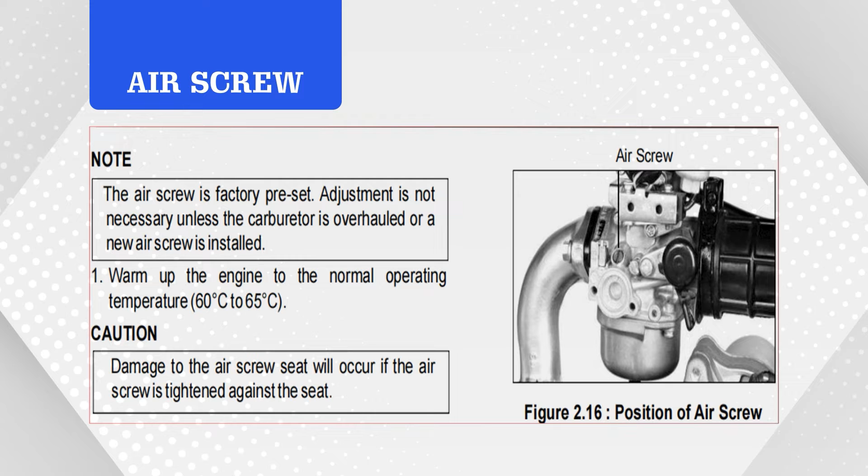For air screw tightening, first warm up the engine to the normal operating temperature, that is 60 to 65 degrees centigrade. Then set the air screw initial opening by turning the screw out 1 to 5/8 turns, and the idle speed should be kept at 1400 plus or minus 100 rpm.

Step 1: Stop the engine and connect a tachometer. Turn the air screw clockwise until it sits tightly, then turn it out to the specifications, as shown in figure 2.16.

Start the engine and adjust the idle speed with the throttle stop screw. Turn the air screw in or out slowly to obtain the highest engine speed. Readjust the idle speed to the specified value with the throttle stop screw, and make sure the engine does not misfire or run erratically. Repeat these steps until the engine speed increases smoothly.

Readjust the idle speed with the throttle stop screw, as shown in figure 2.17. You can see the throttle stop screw readjustment of idle speed here. So the idle speed is required, and accordingly we have to adjust the throttle screw.

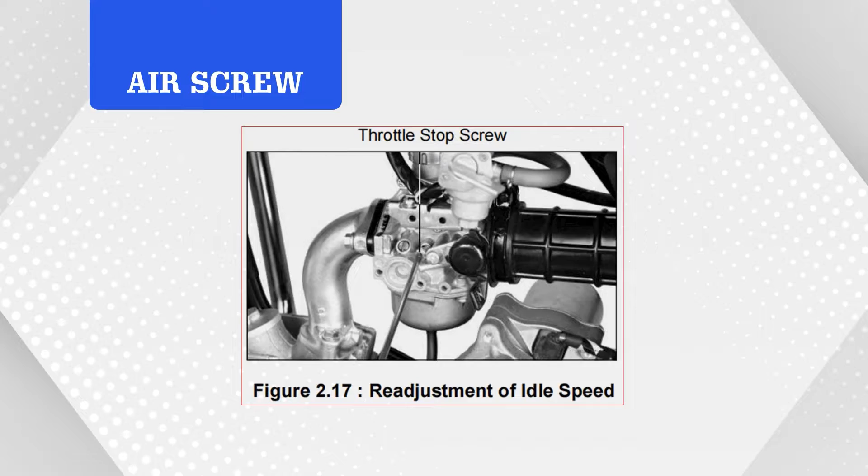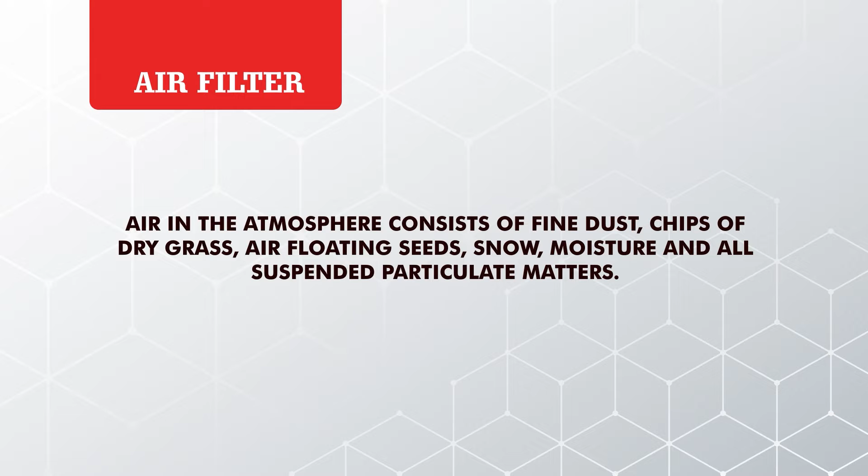Then the air filter. What is the air filter and what is its function? The air filter is used to supply fresh and filtered air to the engine, as shown in figure 2.18. Air in the atmosphere consists of fine dust, chips, dry grass, air-floating seeds, snow, moisture, and other suspended particulate matter. It also reduces intake air noise.

The air filter casing consists of passages for blow-by gas from the crankcase, routed to the engine after oil and moisture is separated from the blow-by and stored in an oil reservoir. So the air filter's function is to avoid dust particles entering the engine or air-fuel mixture. This is the air filter figure, showing how an air filter works.

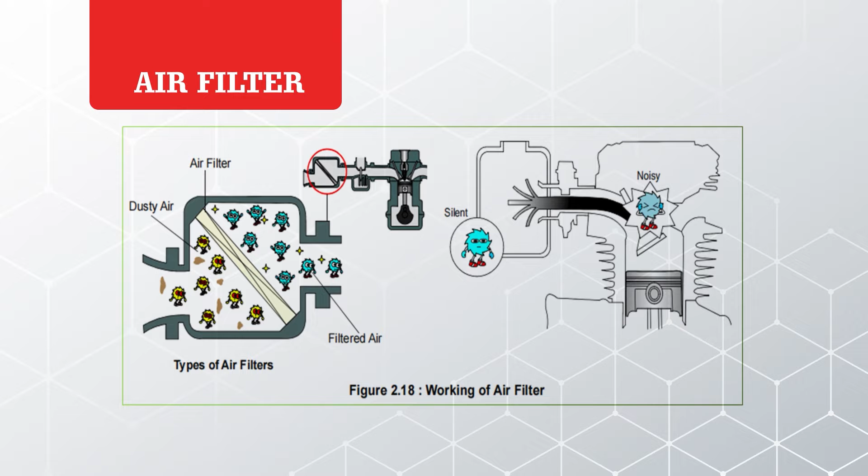Regarding types of air filter materials, there are three types: polyurethane, dry paper, and viscous paper.

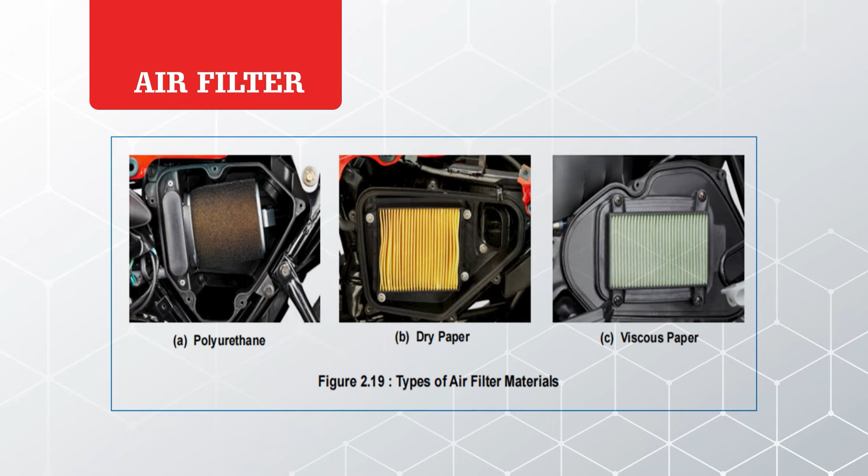Polyurethane is used for mopeds, small motorcycles, and dual purpose vehicles. Its characteristics are reusable with simple cleaning, with efficiency of 90 to 95%. Maintenance involves washing with high flash point solvent and applying oil, then reusing.

Then dry paper, another type of air filter, is used for road sports models. Air resistance is low and it is suitable for high performance motorcycles, with efficiency of 98.5 to 99%. Maintenance is blowing with high pressure air and reusing.

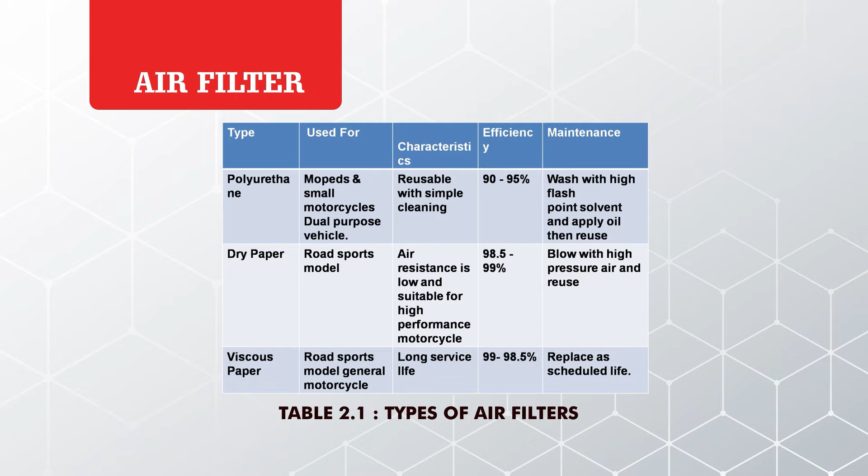The third one is viscous paper, used for road sports models and general motorcycles, with long service life and efficiency of 99% to 98.5%. It is replaced as scheduled; there is no need to clean it. It simply needs replacement once its life is over or according to schedule.

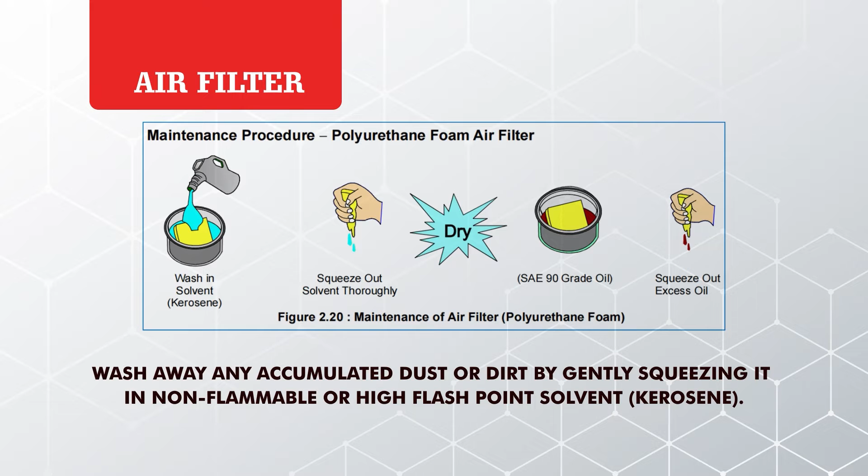So the maintenance procedure for the polyurethane foam air filter: of the three types we learned, one is the polyurethane foam filter. Remove the air cleaner and wash away any accumulated dust or dirt by gently squeezing it in non-flammable or high flash point solvent like kerosene.

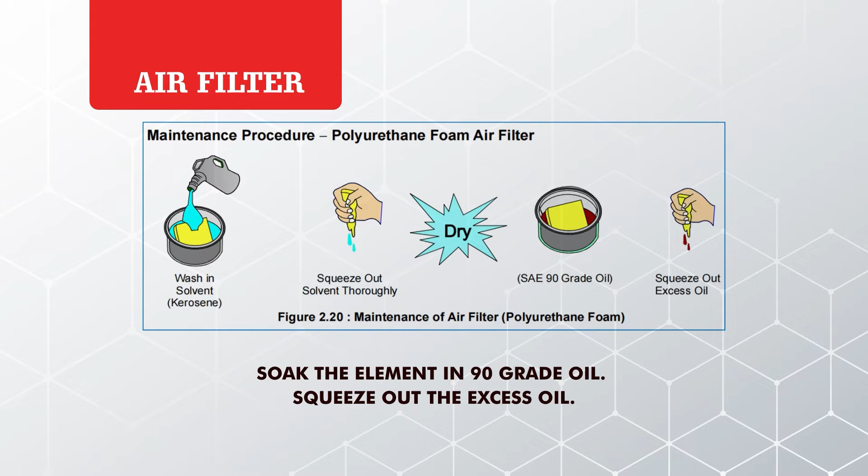Be sure the element is dried thoroughly before soaking in oil. The cleaner has to be dried. Then soak the element in 90 grade oil, squeeze out the excess oil, and apply a thin coat of lithium grease to the sealing surface. This is the procedure for polyurethane foam air filter cleaning.

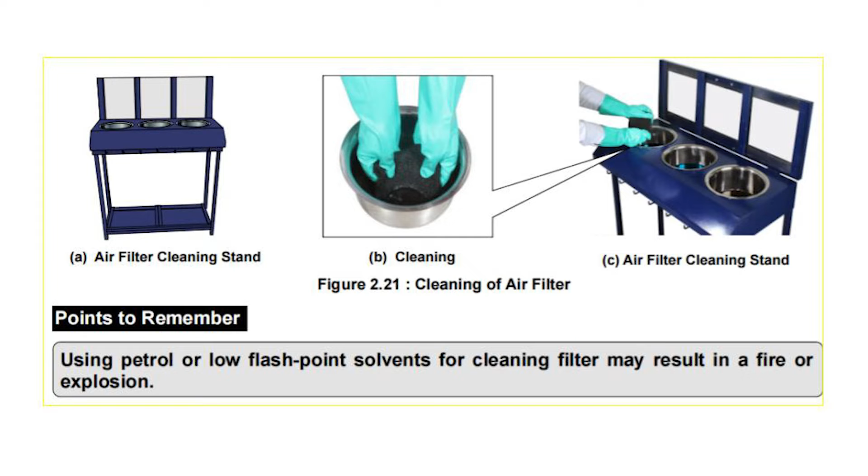Next, cleaning of the air filter. It has to be kept in the air filter cleaning stand. Using petrol or low flash point solvents for cleaning the filter may result in a fire or explosion, so these are the points to be noted.

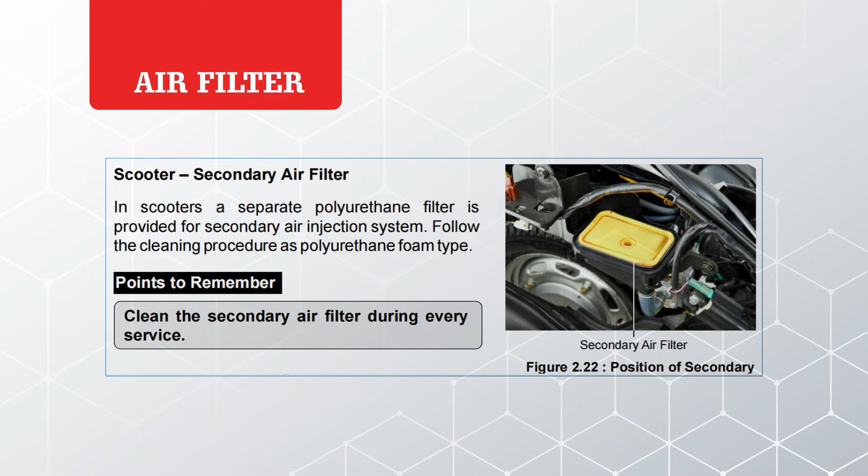Then scooter or secondary air filters. In scooters, a separate polyurethane filter is provided for the secondary air injection system. Follow the same cleaning procedure as the polyurethane foam type. Remember to clean the secondary air filter during every service. Now, maintenance procedure for the dry paper pleated type air filter.

If the surface of the element is dirty, remove the dust first by tapping the element gently. Ensure to keep the carburetor side up while tapping the dust. Then blow away any remaining dust on the surface of the filter with moisture-free compressed air, from the clean side, which is the carburetor side, towards the dirty side.

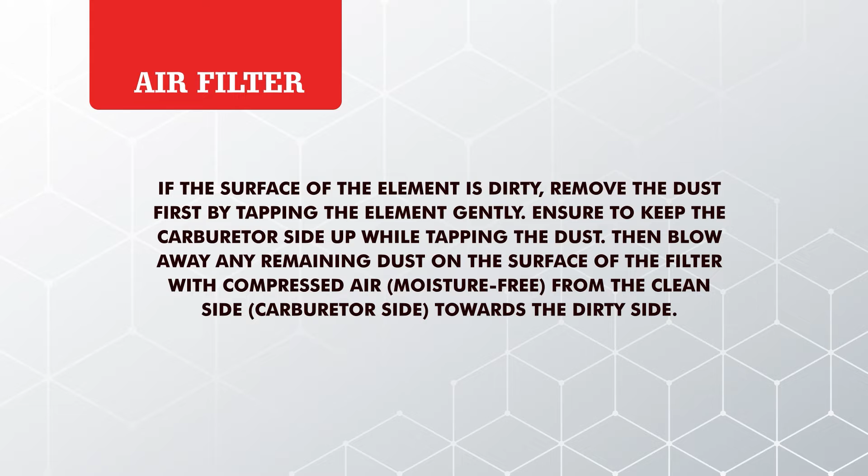Points to remember: never wash the dry paper type air filter. Replace the dry paper type air filter once every 12,000 kilometers of vehicle running. These points are to be remembered, learners.

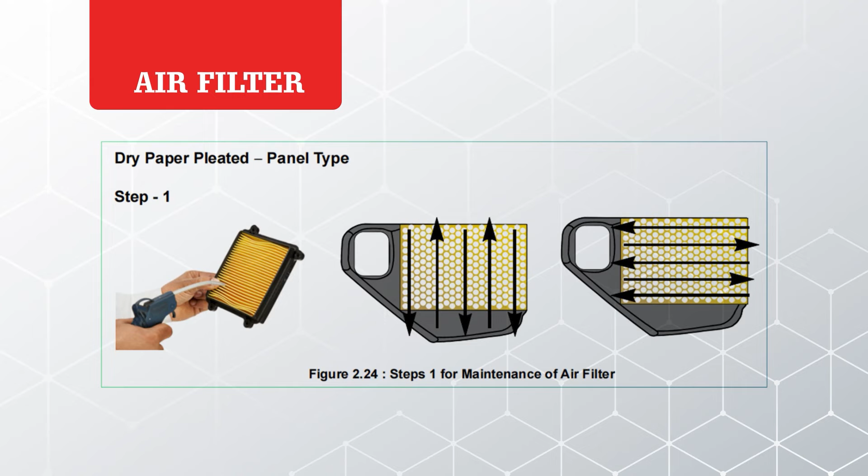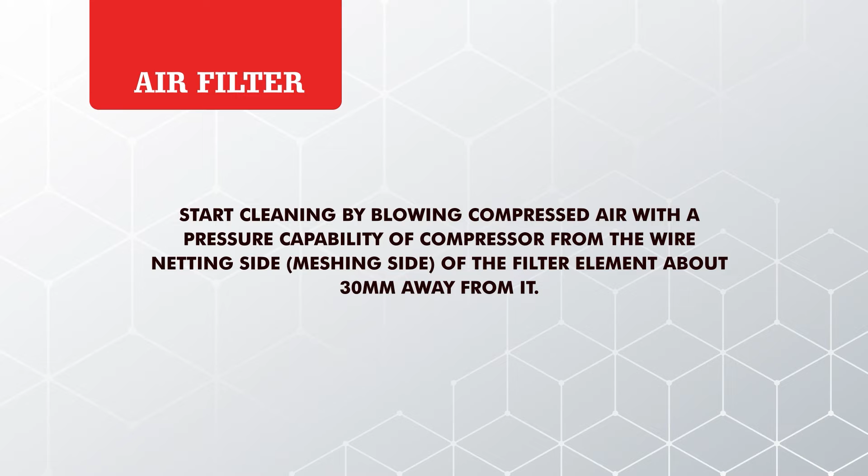Dry paper pleated panel type, step 1 for maintenance of the air filter: start cleaning by blowing compressed air, with the pressure capability of the compressor, from the wire netting or meshing side of the filter element, about 30 mm away from it. Move the air gun in an up and down motion, then left and right alternately, for about 5 times, for a minimum of about 2 minutes. Continue blowing until the dust is completely blown away.

Now step 2 for maintenance of the air filter, particularly for the dry paper pleated panel type: to finish cleaning and remove tiny dust particles on the filter element, blow compressed air from the paper filter side, keeping the air nozzle 50 mm away at a 45 degree angle, and moving it along the paper fold line for 30 seconds.

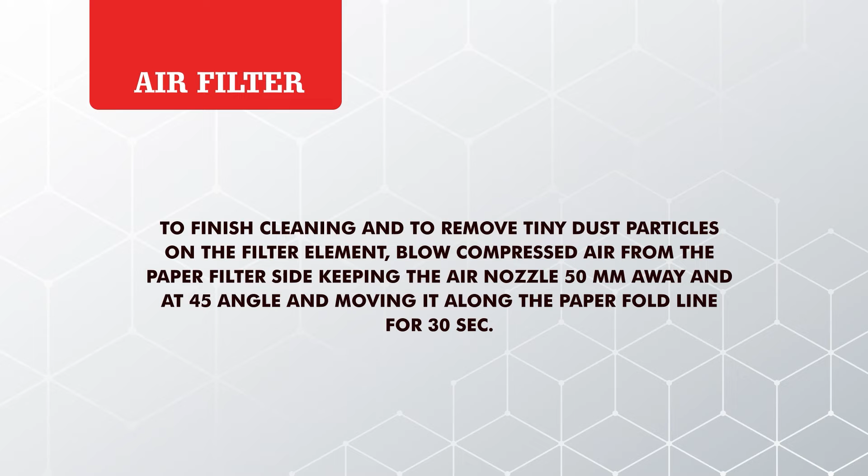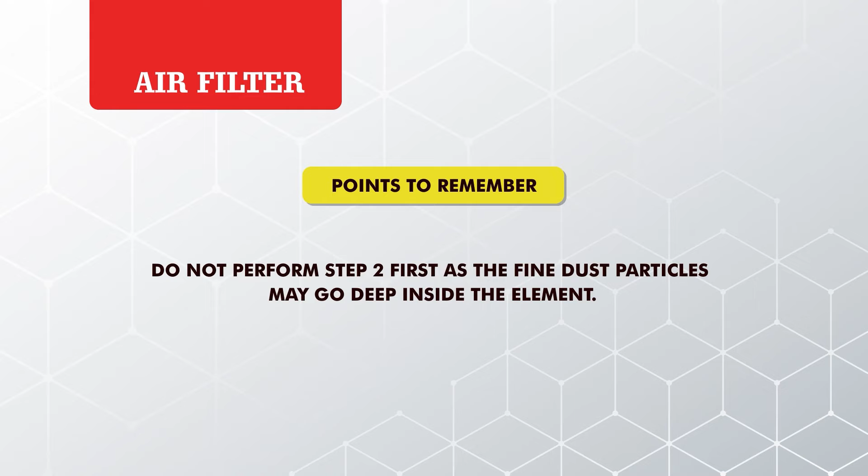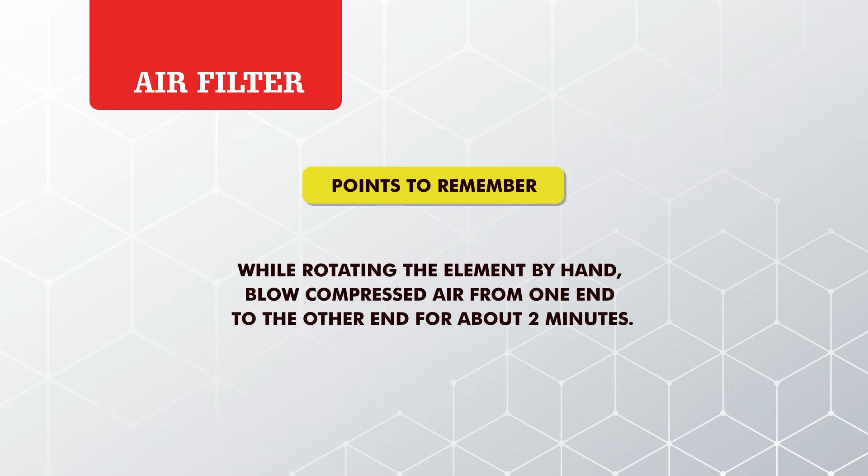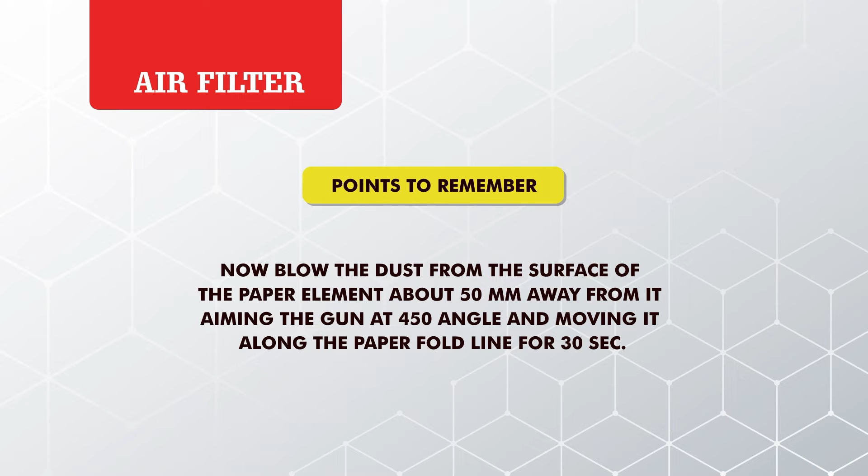Points to remember: do not perform step 2 directly or first, as the fine dust particles may go deep inside the element. First do step 1, then go for step 2. While rotating the element by hand, blow compressed air from one end to the other for about 2 minutes. Then blow the dust from the surface of the paper element, about 50 mm away, aiming the gun at a 45 degree angle and moving it along the paper fold line for 30 seconds. Again, do not perform step 2 first, as fine dust particles may go deep inside the element.

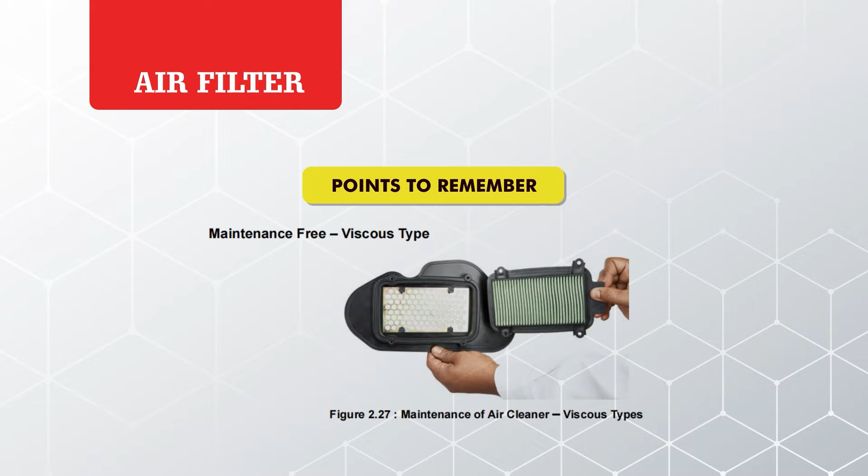Maintenance free viscous type is also one type of air filter. It is maintenance free, meaning you simply replace the viscous type paper according to the schedule, sometimes every 500 or 1000 kilometers. Replace the air cleaner element as per the maintenance schedule, or any time if it is excessively dirty or damaged, as shown in figure 2.27.

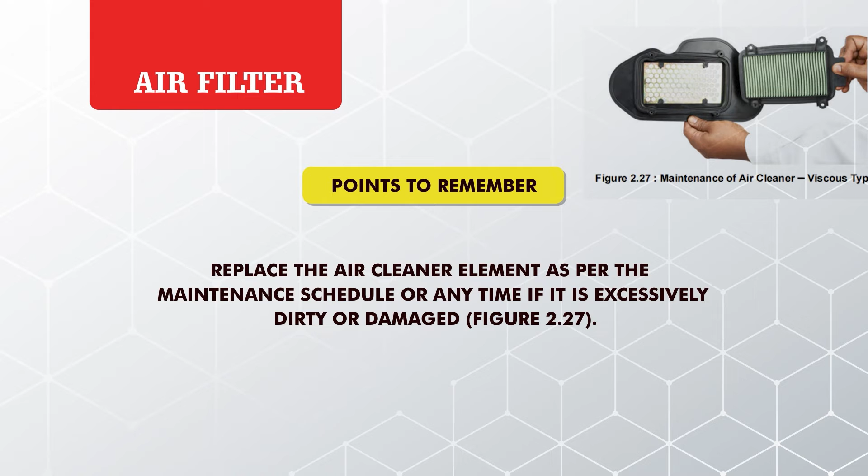Points to remember: never wash or clean the viscous filter. Replace the air cleaner element every 5000 kilometers. There is no need to clean it; it is a maintenance-free air filter. Simply replace it once it is damaged, or replace it every 5000 kilometers, or earlier if it becomes very dirty or damaged.

Replace it earlier if it becomes very dirty, damaged, on the surface or on the sealing area. Check that the air cleaner seal is in good condition, and replace if necessary. These are the points to be remembered, learners, for this viscous air filter.

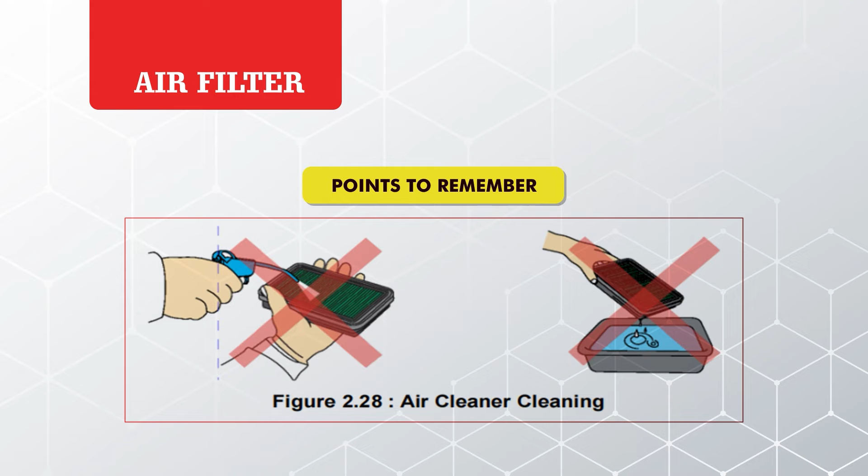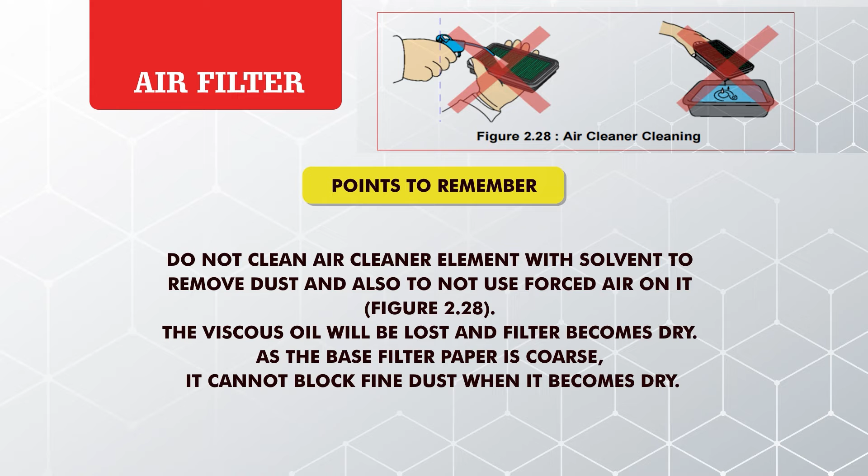Air cleaner cleaning. Do not clean the air cleaner element with solvent to remove dust, and also do not use forced air on it. Figure 2.28 shows the viscous oil will be lost and the filter becomes dry. As the base filter paper is coarse, it cannot block fine dust when it becomes dry. So that is shown in figure 2.28, air cleaner cleaning.

The service life of the spark plug varies with factors of operating condition, type and grade of fuel, and compression ratio, etc. Spark plugs should be inspected, cleaned, and re-gapped or replaced in accordance with the maintenance schedule. So the spark plug is a plug which is used to generate the spark to burn the fuels. That is the function of a spark plug.

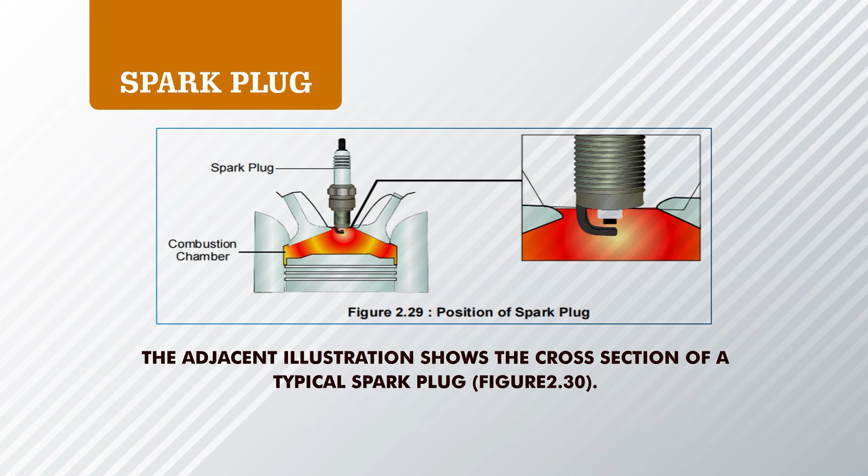It is shown in this figure 2.29, position of spark plug. So the spark plug, where it is positioned in the cylinder, you can see here. The spark plug is given, what should be the gap you can see clearly, and the adjacent illustration shows the cross section of a typical spark plug. The spark plug provides an electrode gap inside the combustion chamber where a spark will ignite the air fuel mixture. So the spark plug's function is to ignite the air fuel mixture.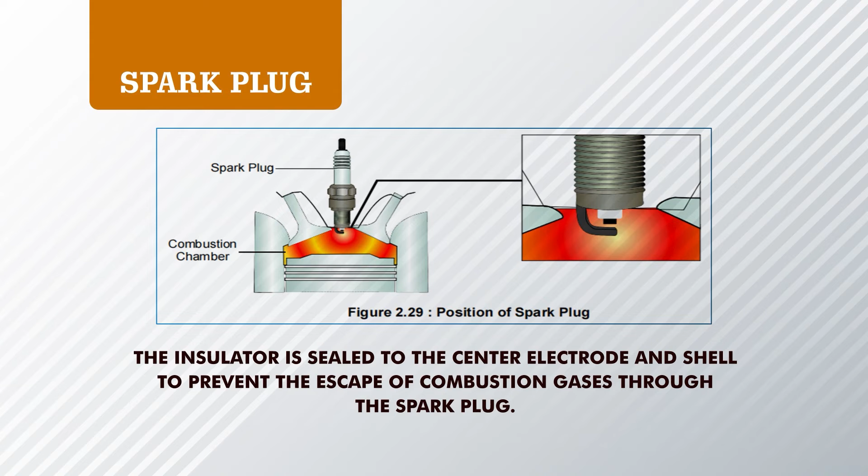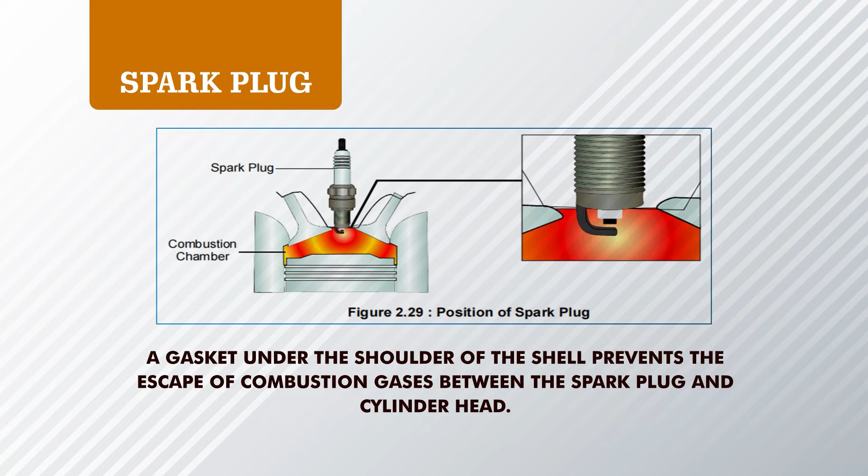The insulator is sealed to the center electrode and shell to prevent the escape of combustion gases through the spark plug. A gasket under the shoulder of the shell prevents the escape of combustion gases between the spark plug and cylinder head. So the learners understood the importance of the spark plug. The spark plug's function is to spark or burn the air fuel mixture in the engine.

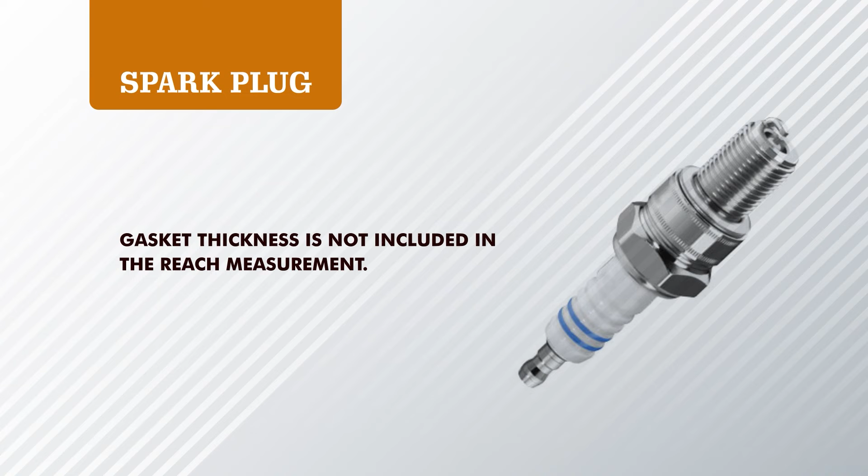Spark plugs are manufactured in standard sizes which are classified in terms of thread diameter and reach. Reach is the distance from the shoulder of the shell to the threaded end. Gasket thickness is not included in the reach measurement. These spark plug dimensions must match the corresponding cylinder head dimensions of the engine.

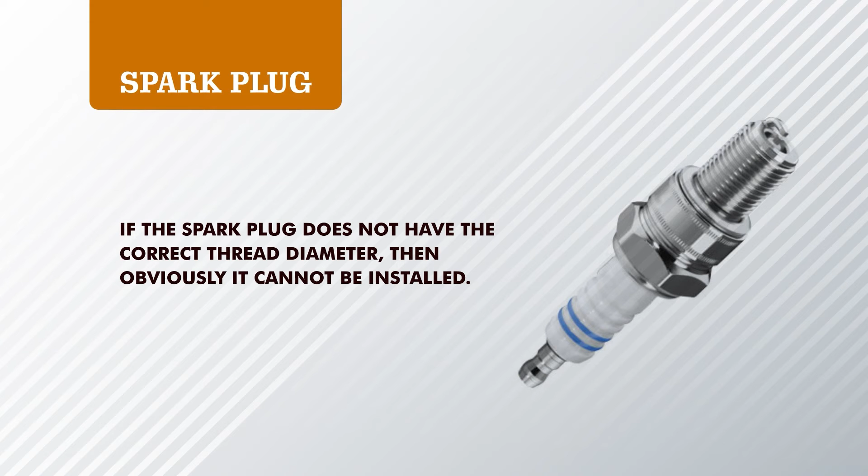For example, Hero MotoCorp engines in a Hero motorcycle recommend a spark plug with 12 mm thread diameter and 19 mm reach, or you can say 3/4 inch. Various Hero models use spark plugs of 10 mm, 12 mm or 14 mm thread diameter and 12.7 mm or 19 mm reach. If the spark plug does not have the correct thread diameter, then obviously it cannot be installed.

If the reach is too long, the spark plug will protrude into the combustion chamber where it may overheat and carbon deposits will accumulate on the spark plug threads, making removal difficult. If the reach is too short, the spark plug will sit in the cavity of the spark plug well, where it will be less effective and carbon deposits will accumulate on the cylinder head threads, impeding installation of the correct reach.

The electrodes of spark plugs are made with copper. Some use a copper nickel alloy. Platinum electrodes are also used to extend the life of a plug. So different spark plug materials have come up. The platinum electrode is also one part of a spark plug. Although platinum is an extremely durable material, it is expensive, a precious material. Therefore, platinum spark plugs cost more than copper plugs.

In recent times, iridium electrodes are also in use because of their high durability, and they allow for an extremely small center electrode with diameter as small as 0.4 mm. Iridium is 6 times harder, 8 times stronger, and has a melting point 1200 degrees Fahrenheit higher than platinum. So that is the advantage of an iridium electrode.

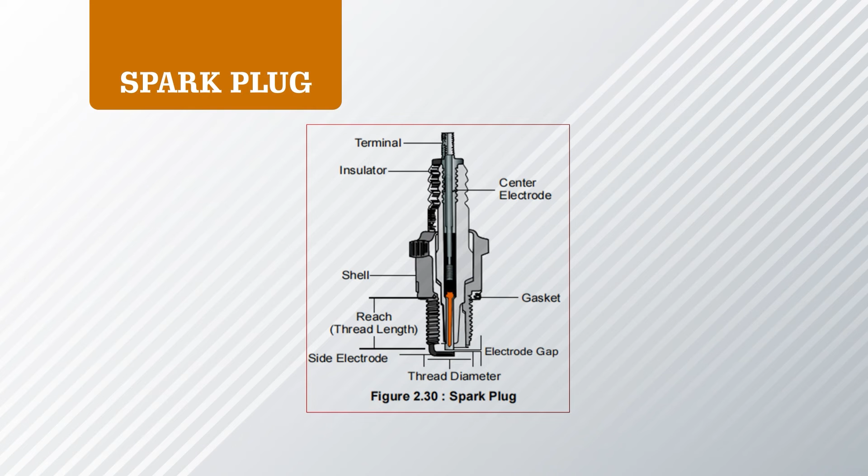Here you can see the spark plug and its parts: terminal, insulator, center electrode, shell, gasket, reach, electrode gap, side electrode, and thread diameter. This is the cross section of the spark plug.

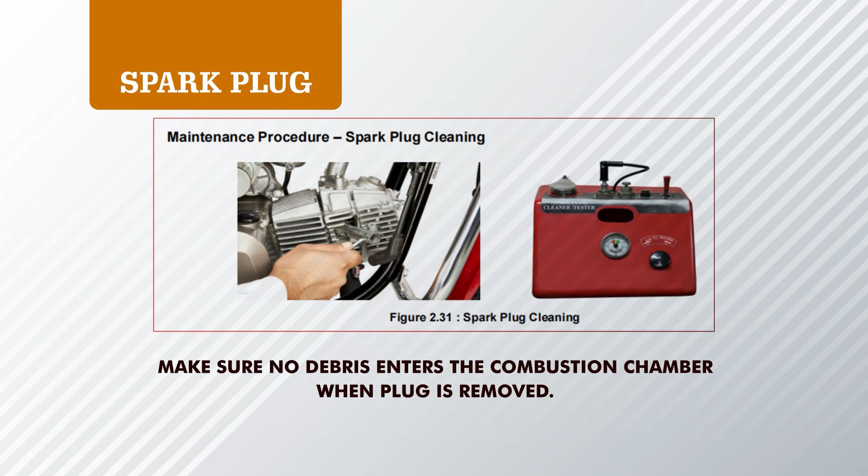Maintenance procedure for spark plug cleaning: open the spark plug, clean around the spark plug base with compressed air before removing, and make sure no debris enters the combustion chamber when the plug is removed.

Learners must remember these things when doing maintenance or cleaning the spark plug. Inspect the spark plug for excessive electrode wear, insulator cracks, or signs of gas leakage, and gray stains on the outside of the insulator near the top of the shell. If these conditions exist, discard the spark plug.

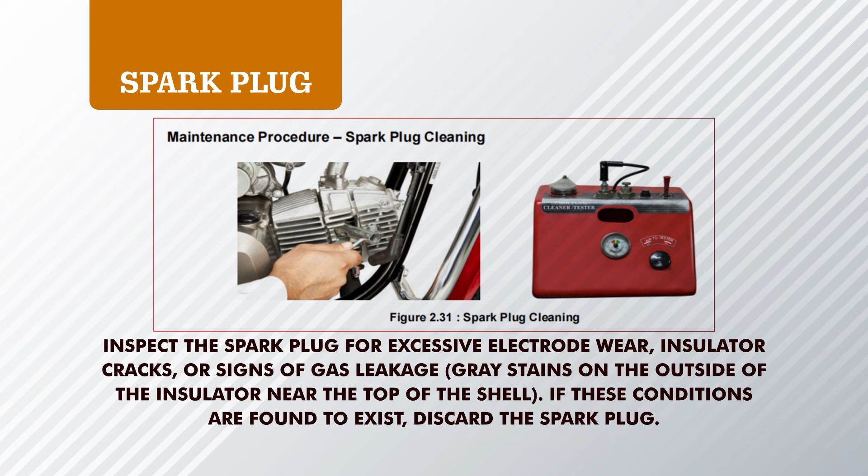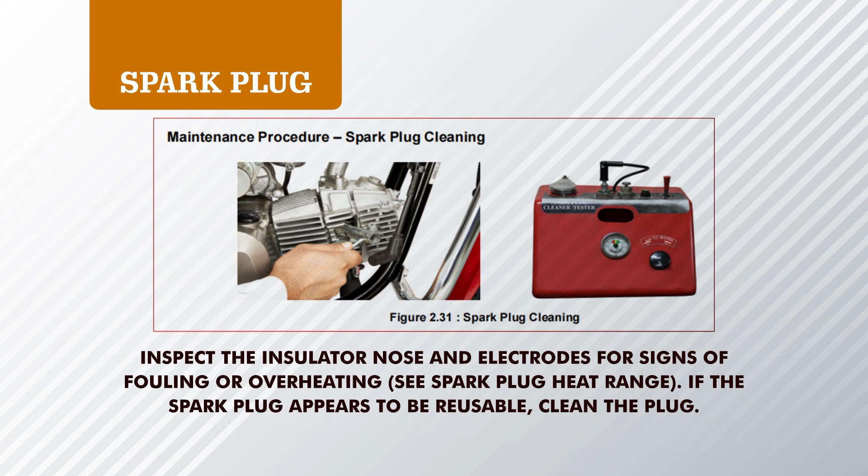Nothing but replacing with a new spark plug. Inspect the insulator nose and electrodes for signs of fouling or overheating, referring to the spark plug heat range. If the spark plug appears reusable, clean the plug and reuse it by rotating and sandblasting alternatively in a spark plug cleaner.

This is the servicing procedure of a spark plug. Points to be remembered: ensure there are no sand particles in the spark plug after cleaning, as this may damage the engine. It must be cleaned thoroughly before you replace or fix the spark plug to the engine.

Spark plug gap adjustment: use a wire gauge. Sometimes because of heat the gap will be reduced or increased, so it has to be adjusted.

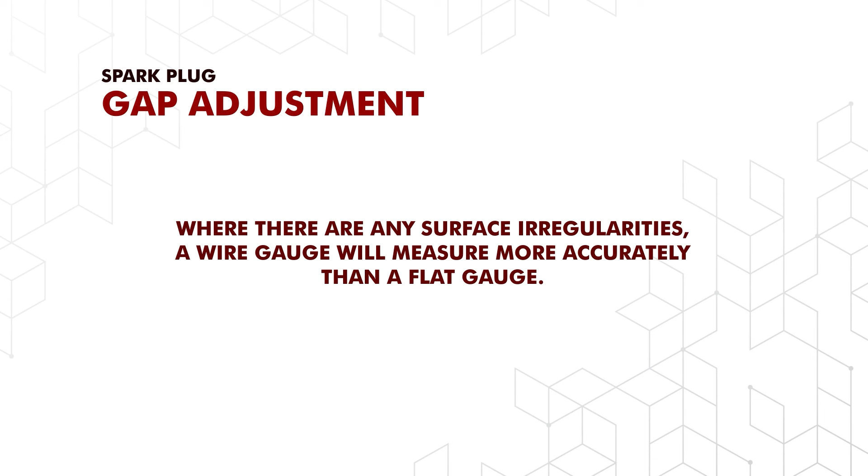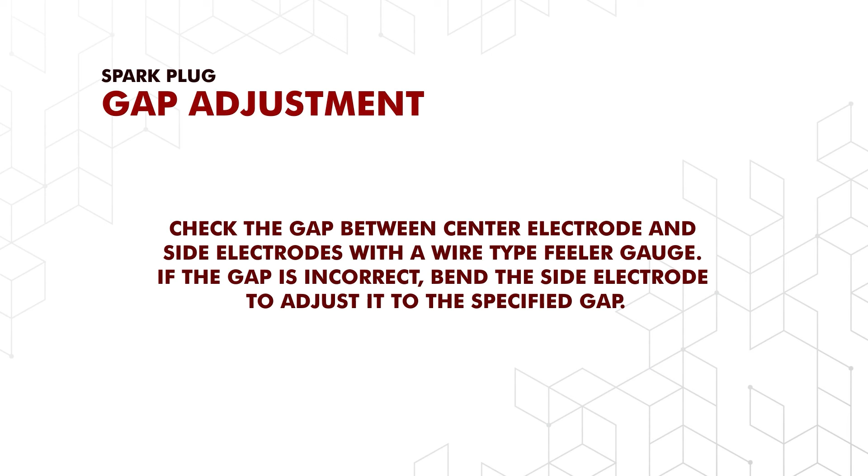Use a wire gauge to measure the spark plug electrode gap. Where there are surface irregularities, a wire gauge measures more accurately than a flat gauge. Check the gap between the center electrode and side electrode with a wire type feeler gauge. If the gap is incorrect, bend the side electrode to adjust it to the specified gap.

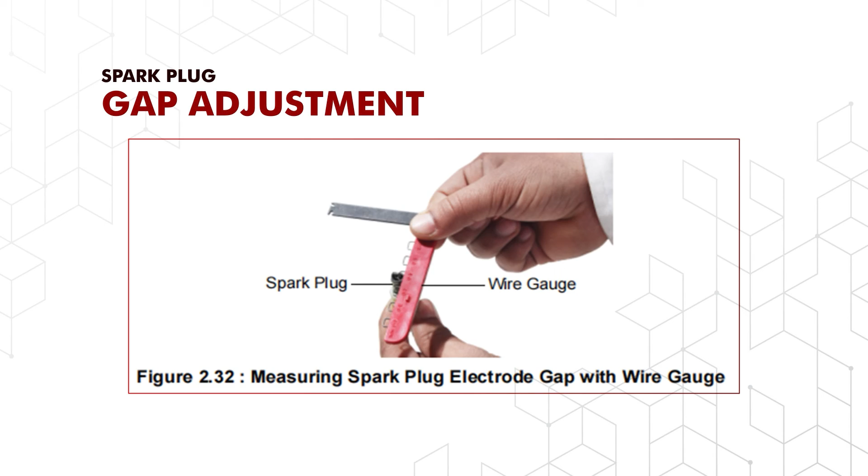This is measuring the spark plug electrode gap with a wire gauge. Points to remember: all spark plugs, whether new or used, should be accurately gapped before installation. The electrode gap is adjusted by carefully bending the side electrode.

Maintenance procedure: spark plug tightening. The optimum spark plug tightening torque varies with factors such as cylinder head thread material, whether iron or aluminum, and the condition of the cylinder head threads, whether clean or dirty, dry or oily.

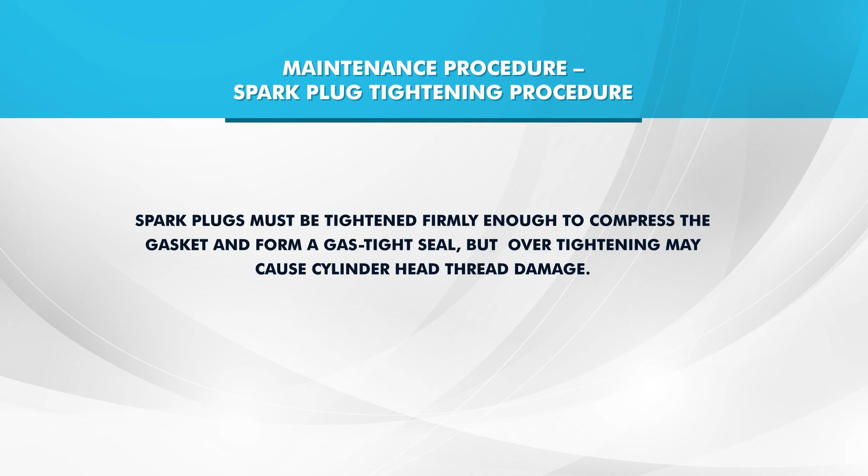Few people use a torque wrench to install spark plugs anyway. Spark plugs must be tightened firmly enough to compress the gasket and form a gas tight seal, but over tightening may cause cylinder head thread damage. The spark plug gasket can be reused several times provided it remains with the same spark plug and cylinder in which it was originally used.

Spark plug tightening procedure: hand tighten the spark plug before using a wrench to tighten it to the specified torque. If it is a new spark plug, tighten it about half a turn after the sealing washer contacts the seat of the plug hole.

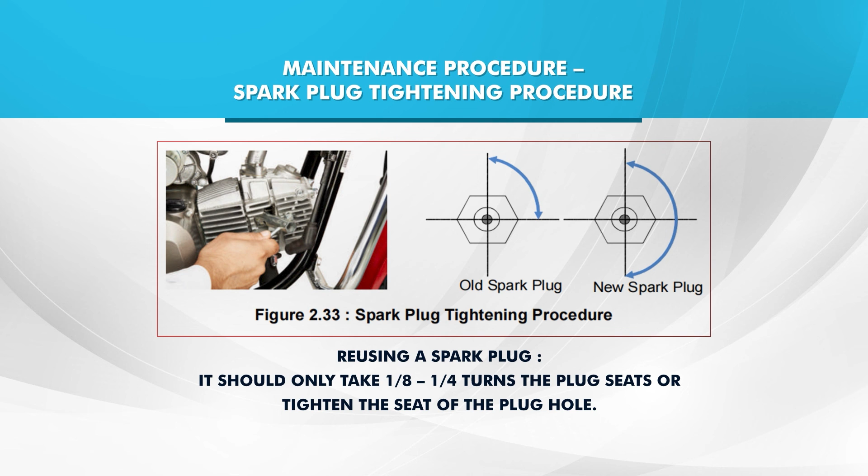When reusing a spark plug, it should only take 1/8 or 1/4 turns after the plug seats at the seat of the plug hole. This is shown in the figure for both the new spark plug and the old spark plug.

Points to be remembered: to prevent damage or cross threading, first hand tighten the spark plug before using a wrench to tighten to the specified torque. Over tightening the spark plug may damage the cylinder head. The correct tightening procedure of the spark plug is shown in these figures.

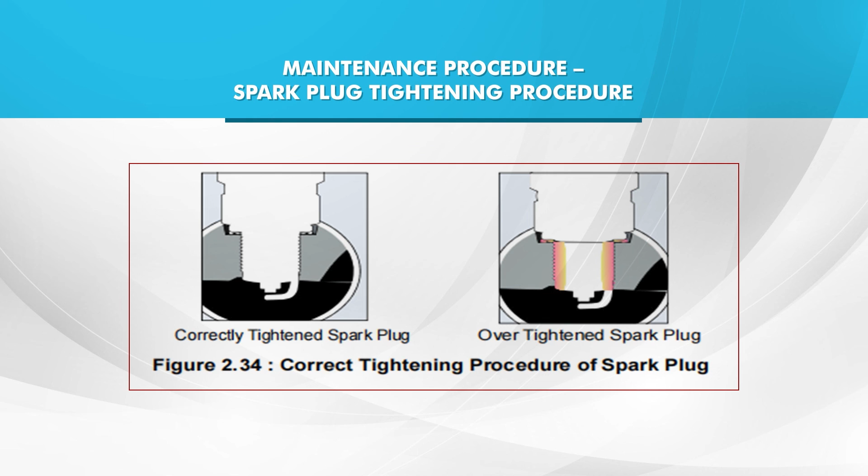Thank you, with this I conclude the video. I hope you learners have learned about the spark plug and carburetor, including the functions of the carburetor and the function of a spark plug. I hope you understood about the spark plug and carburetor functions.